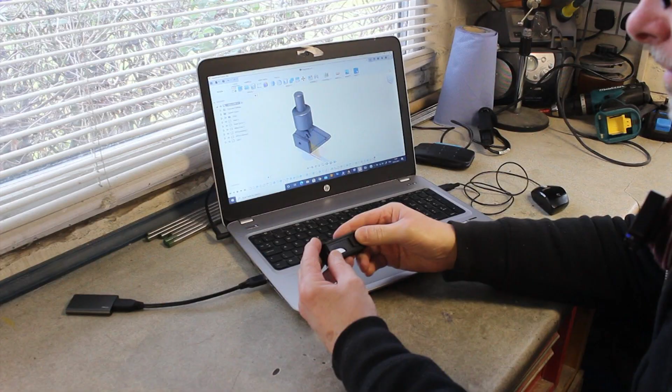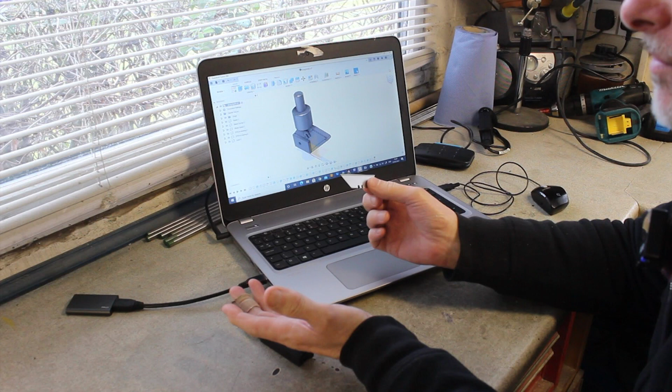Down at work I need to cut cardboard to make boxes, specific boxes. I can't get boxes for some of the products we make that fit properly, so we're thinking of making our own. Also, some of the products I actually sell have a cardboard inner, which is part of the product. So I'm fed up with guillotining bits of cardboard up.

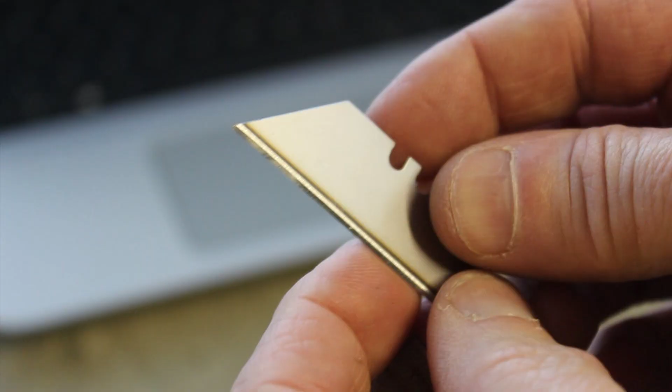So I'm going to make a drag knife, and this is the blade we're going to use. So here it is. This is what it will look like, hopefully. I've had a little look, and this isn't a new type of design. There are commercial versions of this out there. However, I've been looking at them and I thought, why would you do that in this modern day and age?

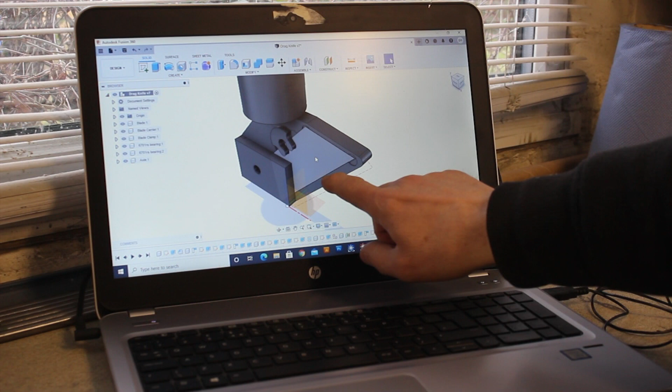On most of them, the blade here is completely exposed at the front. Why would you do that in this modern health and safety age if you didn't need to? So I've actually encased it so that it's less likely that when you're taking the thing off the router, or putting it on, you're going to slice lumps out of your hand. Take it from me. So I've encased it.

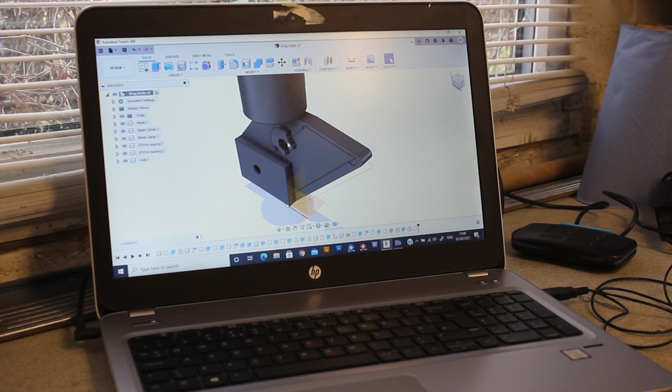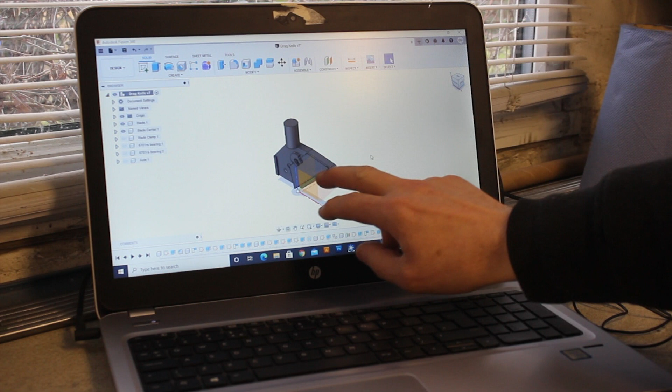Let's go back to the main view and I'll show you exactly what's in here. If I turn the axle off, there you go. And in fact we'll turn the bearings off and the clamp that holds the blade in. Right, so it's just a simple bit of milling with a spindle on the top. On top of that we fit a bearing. There'll be a spacer that I haven't modelled and another bearing, and then over the whole thing goes an axle.

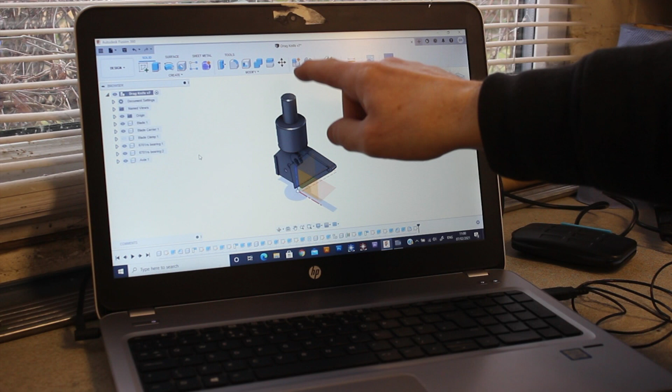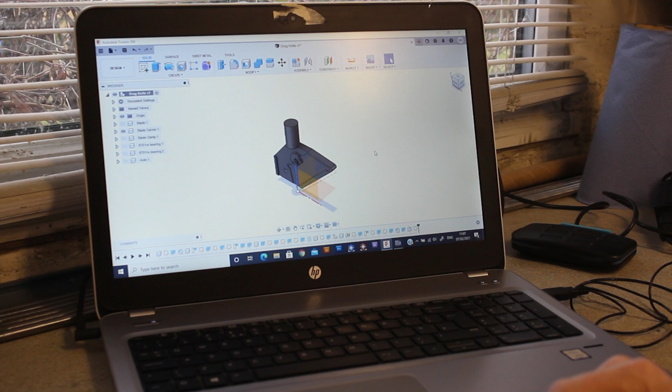So the blade carrier here will be able to spin irrespective of whether the spindle is moving. The last thing you should do with these is turn the spindle on, because you'll turn this into a missile. So let me just turn those bits off. Actually, let's turn the blade clamp off as well. And in fact the blade, there you go, that's the bit we've got to make to start with, which is actually quite a difficult piece to do.

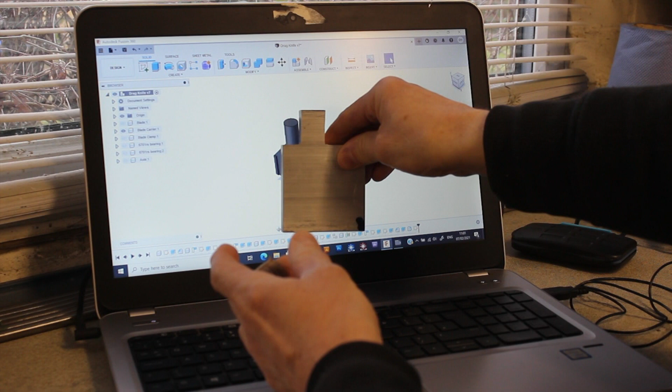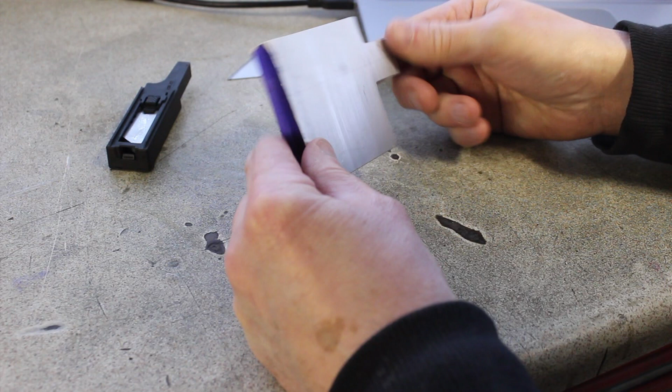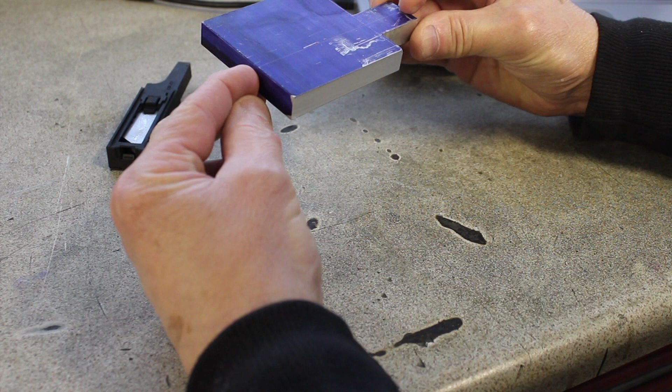Off camera I've whopped out a bit of ally to roughly the right shape. I need to put this in the lathe and turn this piece down so that it's a diameter 12. This part is actually quite a difficult part to hold, because in the finished shape there's nothing that's square or parallel to get a good grip on in the vise. I did think that once this is round I could hold it in my fourth axis, machine one side and just spin it over and machine the other side.

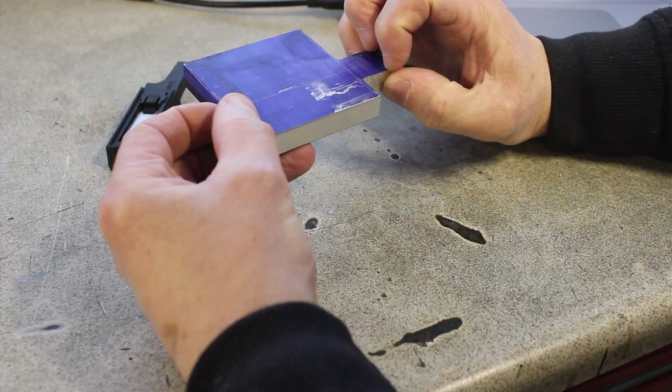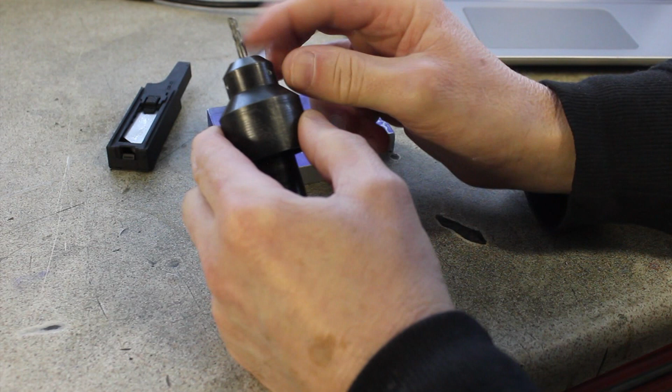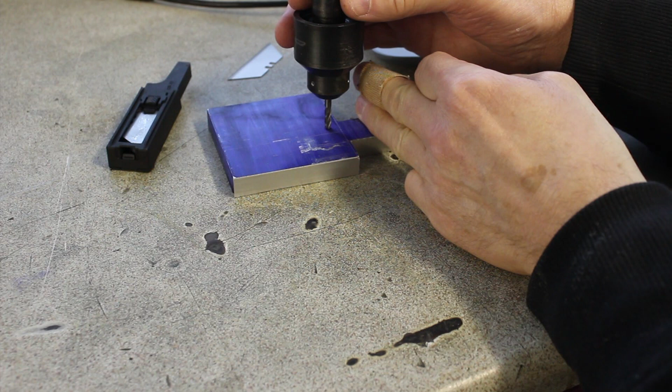The problem with holding it in the fourth axis is the chuck is so big that I won't be able to get close enough access with the tool. So I'm quite limited in tool space. I'll just get that and show you. This is the tool I'm going to use for most of the operations, because it happens to be in the tool holder. I might change it for a new aluminium one, but this is a 4-flute, 4mm. With the chuck holding this part, I'm going to crash the tool into the chuck.

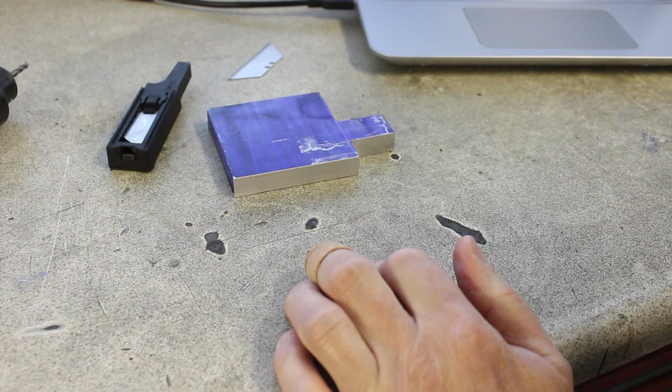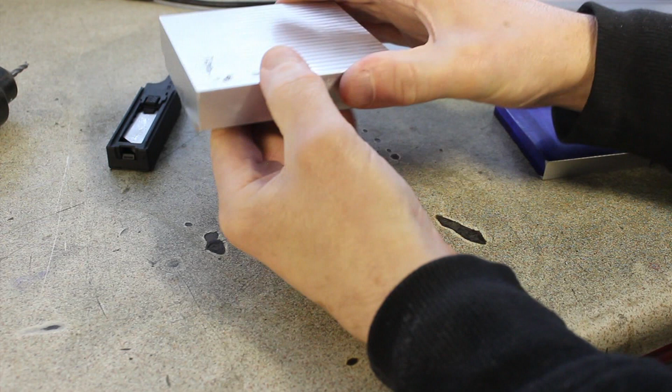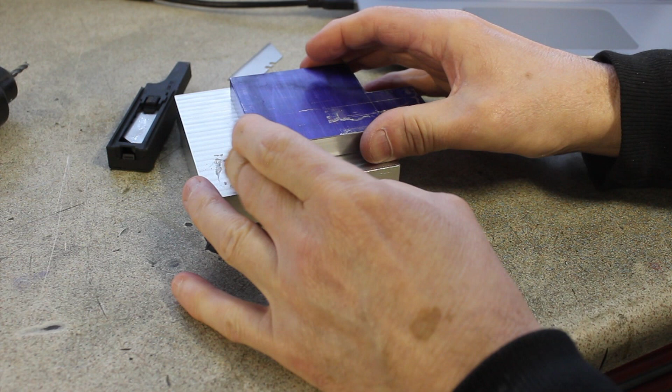So I've come up with another solution which I think should work for another work project that I'm not going to show you. I made this, which is a pallet. This sits in my vise, and I've marked it so that it always goes in the same way. And I'm going to use the painter's tape thing. So we're going to actually super glue this part to this plate that's in the standard milling machine vise.

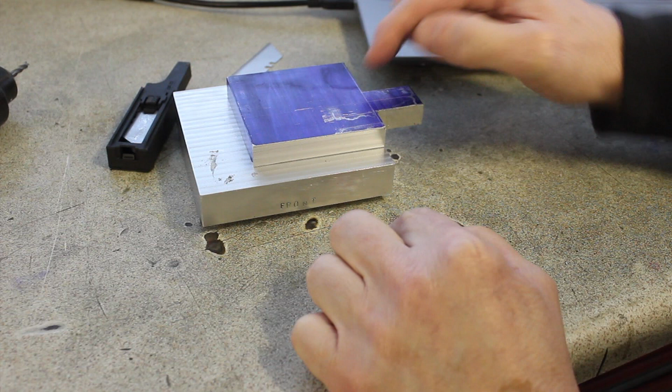So then I've got unfettered access. Yeah, so you can see it easily. So I've then got unfettered access to everywhere I need to go, everywhere the tool needs to go on top of that part. And the flip side is really just a case of putting it in there and facing it off. So I'm not even going to make the code for that. I can do that easily within Mach3.

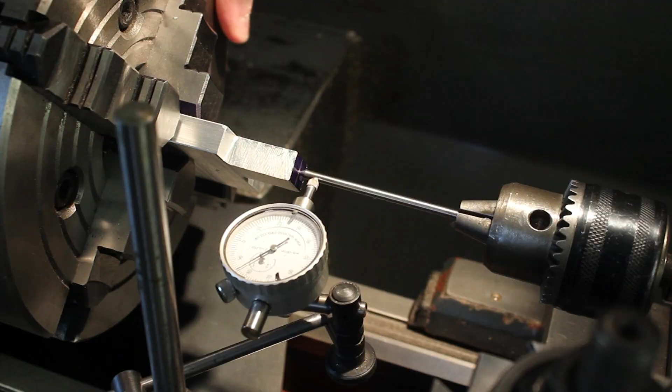So first op, put this in the 4-jaw in the lathe and make that cylindrical, because once I've machined everything else, I can't hold this part, so I have to do that part first. Here we are in the 4-jaw, and there's a little bit of wibble wobble, but we're not overly worried about that, because this part is about nearly 1 millimetre bigger than it needs to be. So with half a mil off either side, as long as I'm within half a mil of the centre, I'm golden.

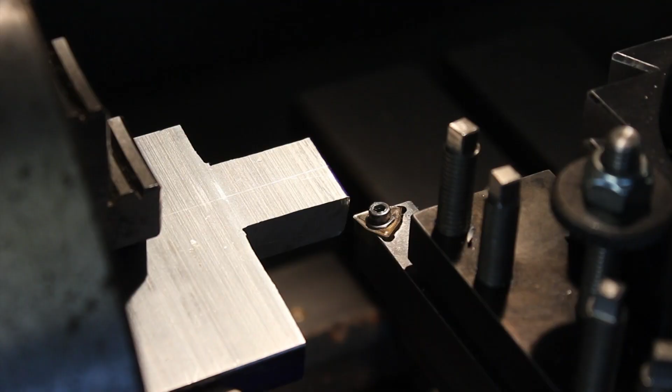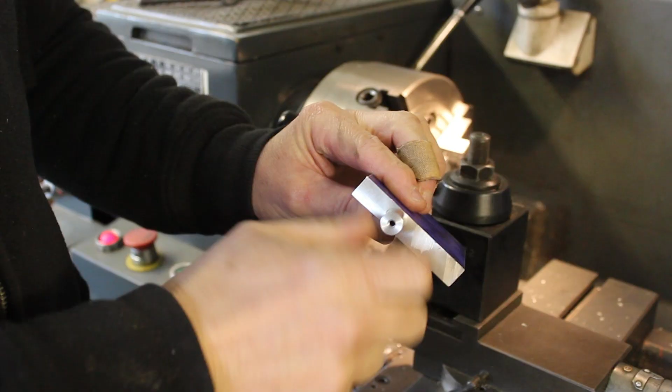Okay, there we have it. The only thing I've changed from the CAD drawing is I've tapped it with an M4, because I just get the feeling I might want to add a screw to retain it inside its housing so that it can't fall out. That could be catastrophic. So here's the bearing, which is a light fit. There you go. Push fit. Here's the front.

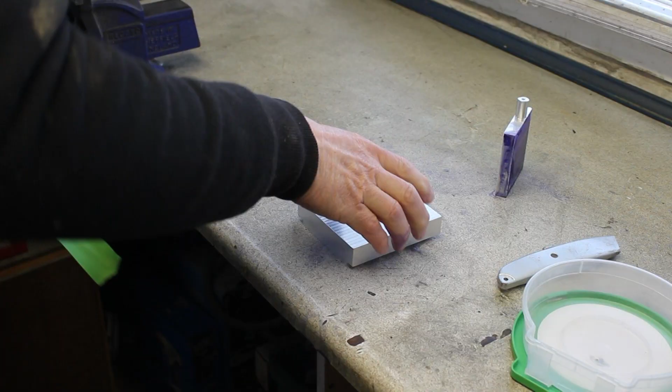I was a bit sceptical about this as a sensible method to hold something while you're CNCing, because I thought the loads might be too high to make it work sensibly. But I have to say, having tried it on another part last weekend, I was blown away. It took a real effort to actually get the bloody part off the pallet when I'd finished.

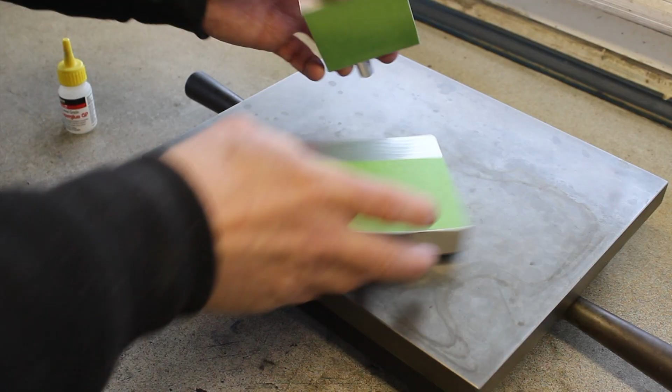I could just stick this on like so and use my finger to line the edge up, but I thought, as I have a surface plate, a knackered old scratched one, the best option is to line it up like so, clamp it up, leave it for 10 minutes for the super glue to get a decent bond, and then I'm away, and I know that I will be square to the mill.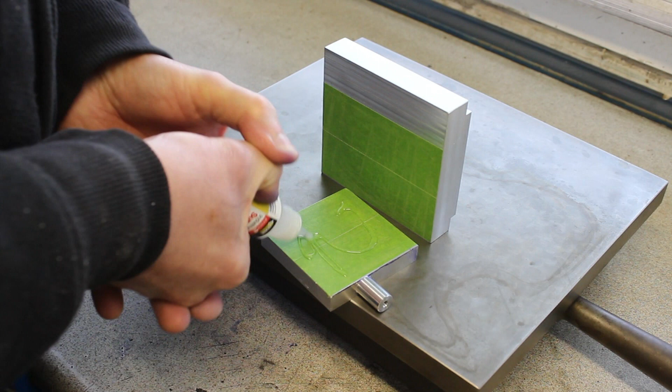Woohoo! I would use my finger. Hell, no, I will use my finger. There we go. There we are.

Give that a few minutes. While that's curing, setting, whatever the word is for super glue, cheap super glue, industrial grade super glue, yeah, I bet, I'll go and set the mill up. Here we are over at Sally the Sieg. Let's just put this pallet in.

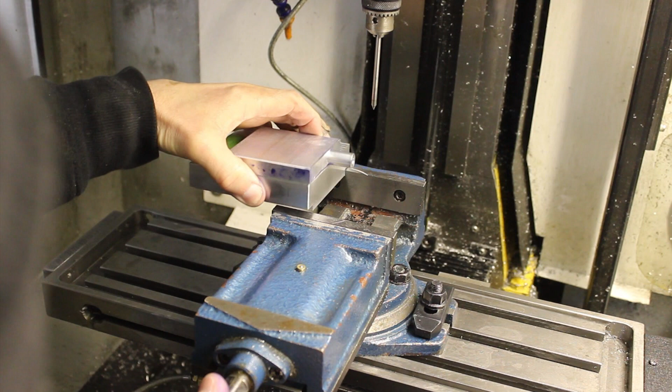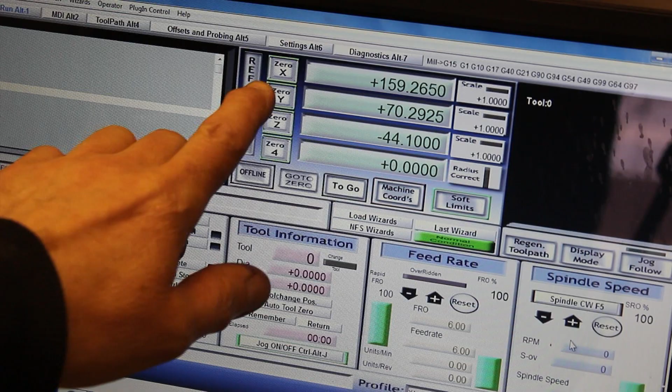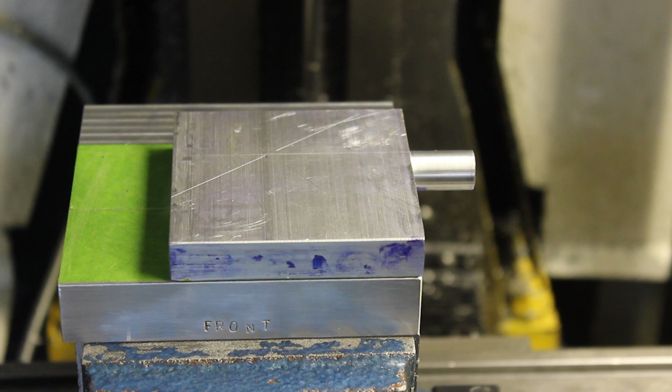We have a 4mm carbide tool in the spindle. I've set up the G54 zero. Hopefully we shouldn't be too far out. Any deviation will bugger up this shaft here. So I've done a dry run at 20mm above. It seems to start correctly. So here we go. Cycle start. Head goes up to reference zero, then it should come down, go to 1mm above, there you go, and start plunging in.

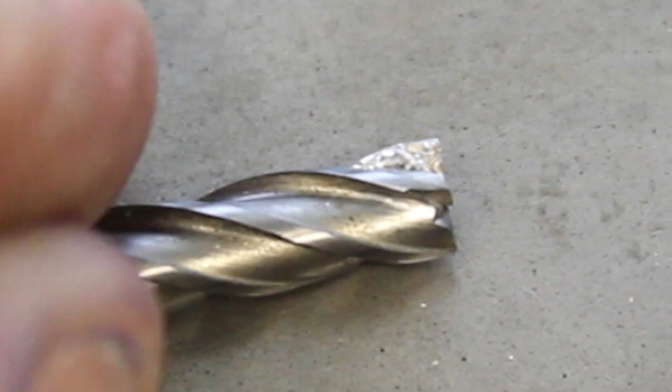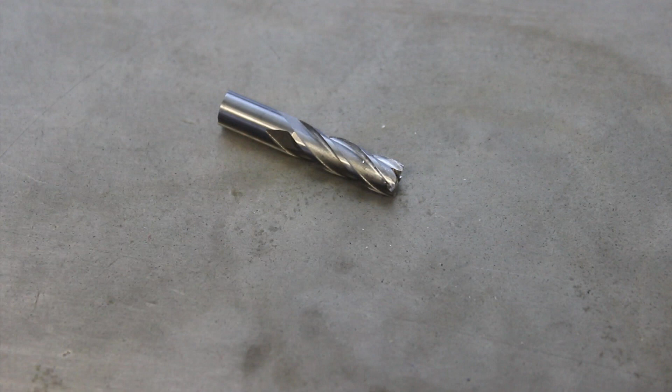I'm not using coolant because I think it'll end up breaking the joint and the part will fly off. So, oh dear, that's the end of that. Here's the problem. Chip weld. So I put a 2-flute in, which is specifically intended for aluminium. I'm also going to risk it by running a very light amount of coolant on.

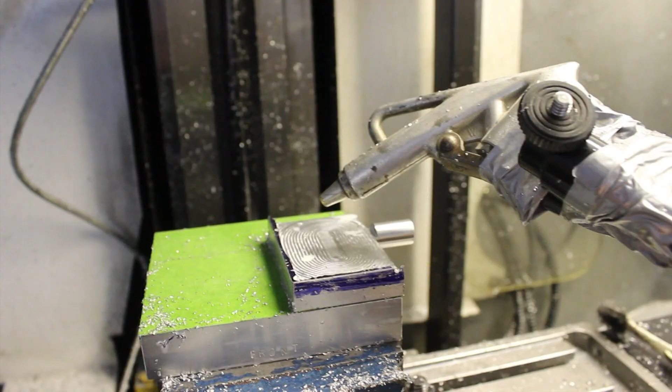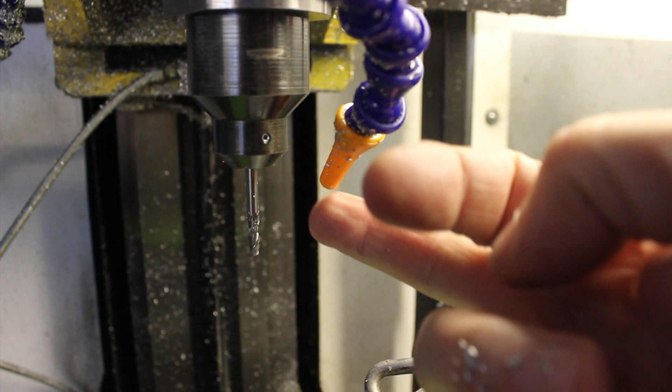There we go. Op 1's finished, and I've jury rigged myself a mist system. There's a slow bleed of air coming out of here from Edward the compressor, and when the tool comes down, the nozzle just drips on the top of the blowgun, and it mists. So yeah, it's not elegant, but it does the job.

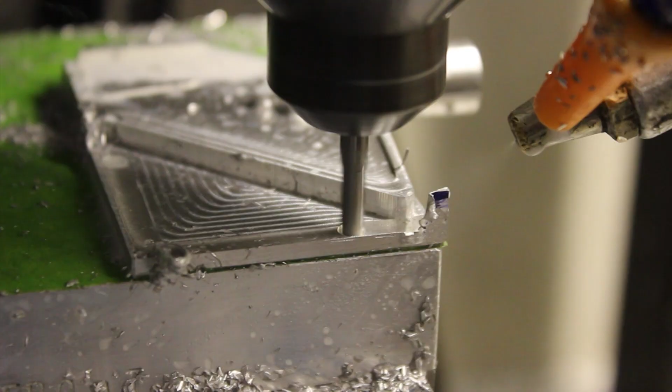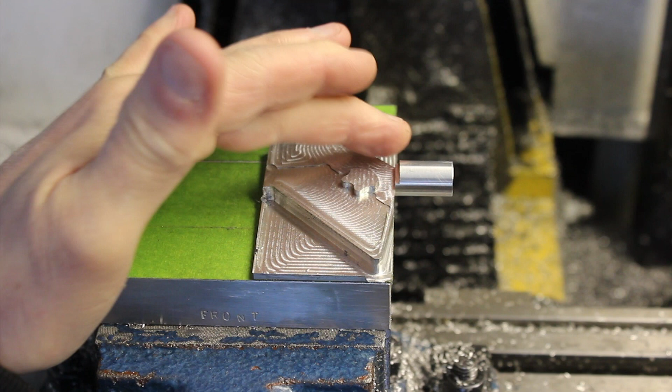This is interesting. It's a week later since I did the last machining op on this part. I had to go to work, and I couldn't be bothered last week. So the next op is to go round the contour and nibble off effectively a bit along the bottom here, and hopefully tidy up the edges.

But the thing that I think is interesting is this has been stuck for over a week now, and the painter's tape is slippery because there's clearly oil in the mist lubricant that I used last week, but it's absolutely stuck firm. So I do wonder, I'll have to do some experiments at some point, whether you could use flood coolant on this for a short job, a couple of hours or so, and still have it stuck on. So anyway, the next op, like I said, is to do the contour. So let me get on with that.

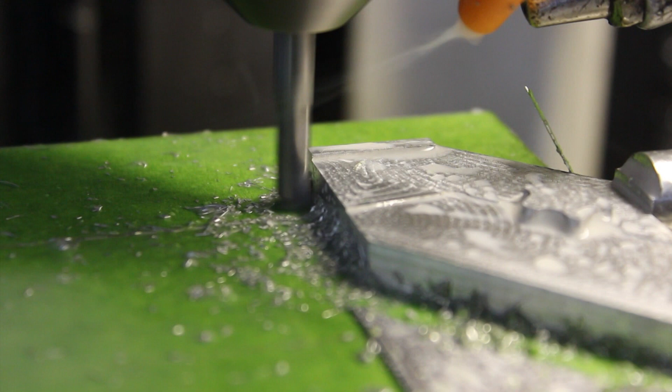Right, I've finished the contour path. Got a reasonable finish on it. I'm quite pleased with that. Slight balls up here, but I caught it before it completely gnarled the part up. I changed the tool because I didn't like the finish I was getting with a 4mm, so I put a 6mm cutter in, and I forgot to change the tangential extension, so consequently I nibbled a bit out of there. Anyway, it's not the end of the world.

This is the final pass with a 2.5mm high-speed steel cutter, because I don't have a carbide one, so it's going to run quite slowly. So let's give it a bash.

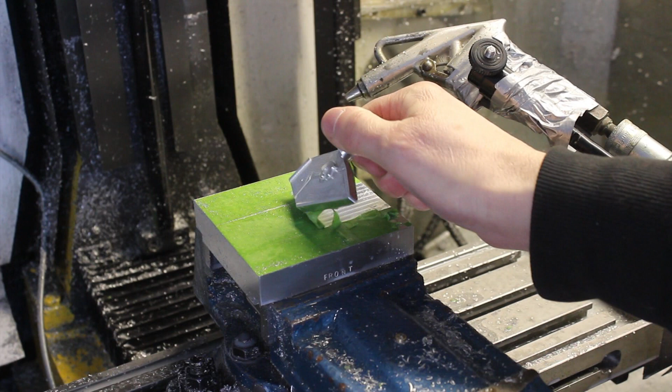All that remains is to get this off. I've sharpened up a screwdriver rather than bugger up a decent chisel. And I'll try and get this up without damaging it. Too much. There we go, it's coming. Right, let's clean that up and go and have a look at it.

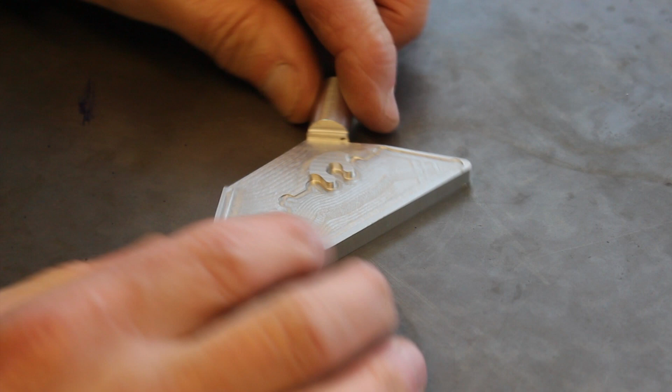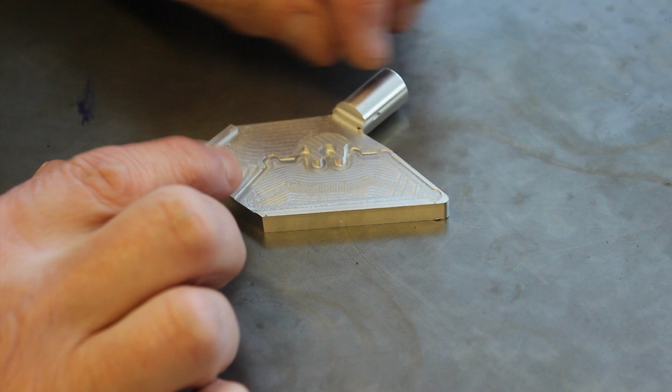Okay, so here we are. That's looking all right. I've yet to clear the back up. Like a numpty, I should have actually machined the back first, then flipped it and then machined the front. But here's a blade. Yeah, that fits more or less that way. There's a tiny little bit I need to remove at the top here. The blade is slightly different shape, I think.

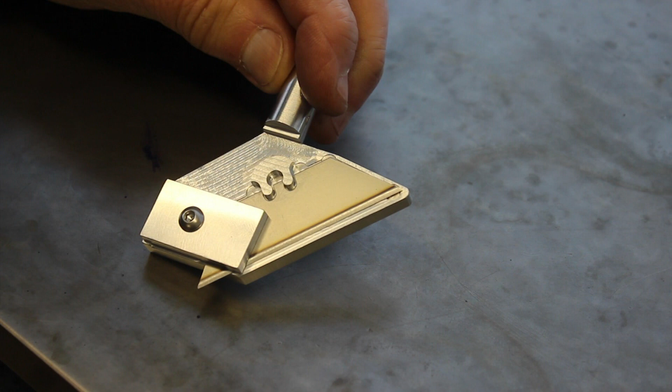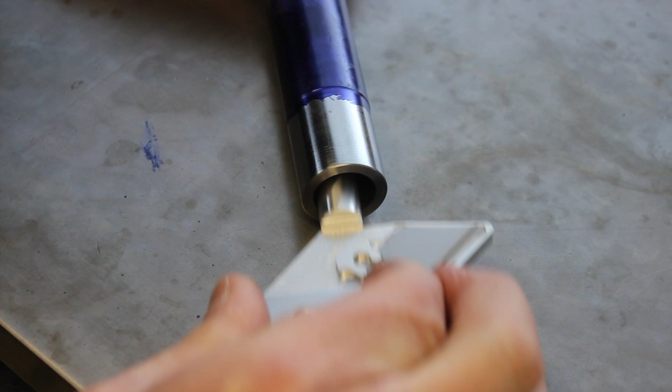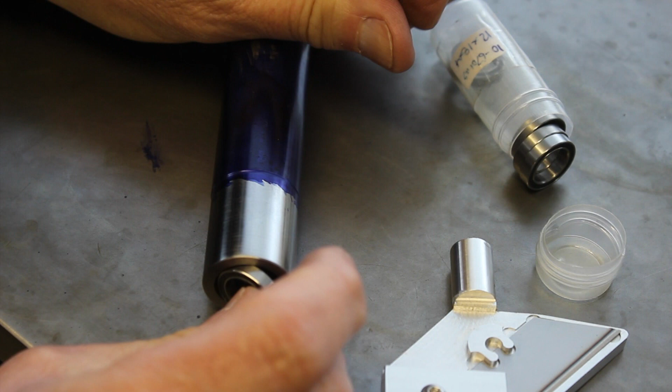Right, so there we have it, assembled. I did face off the back in the end. I thought, yeah, looked a bit crappy, so I've made it look less crappy. Pleased with that so far. That looks almost good enough to work. Right, off camera I've started to turn up the bearing housing. So that's in there ready. The bearings... oops, the bearings are a reasonable fit in the end there. You'll have to take my word for it. So all that remains is for me to cut this off to the right length and turn it down to fit in a collet. And then we can press fit the whole thing together.

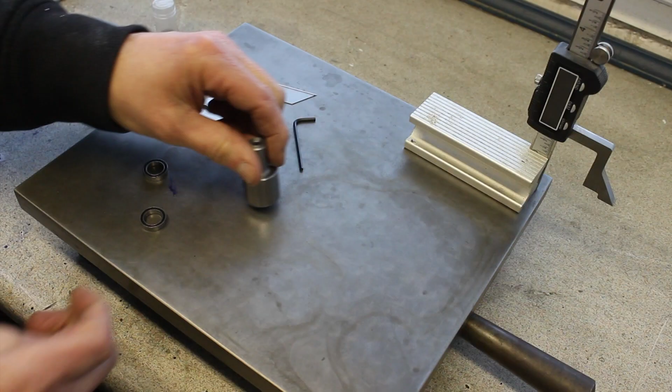10 minutes later, actually more like half an hour later, I've turned up the axle, as I'm calling it. It goes in there like that with the two bearings. I also found some old piece of brass, bronze, whatever, kicking around, so I've made a little spacer to keep the bearings apart. I've heated the bearings up and got them fitted with the little spacer. So they should be a push fit in here. They should be a tighter fit than this, but I might just put a bit of Loctite in to make sure they don't fall out. So let's put the blade in. Ow, carefully. Whoops.

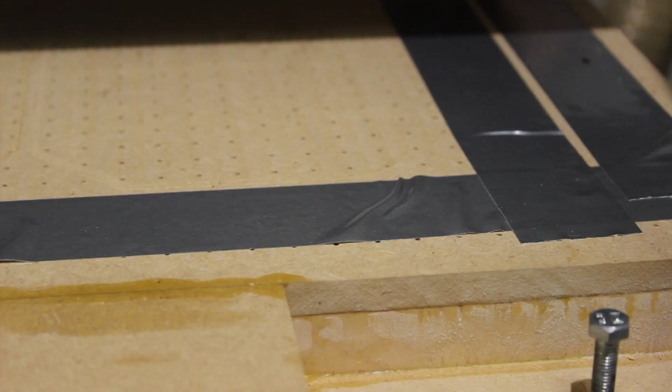Well, there we have it. My version. Here it is. My version of a drag knife. The only thing to do is to put it in the machine and give it a go. See whether or not it works. You can see that the actual drag knife is completely separate from the spindle. Right, here we go in real time.

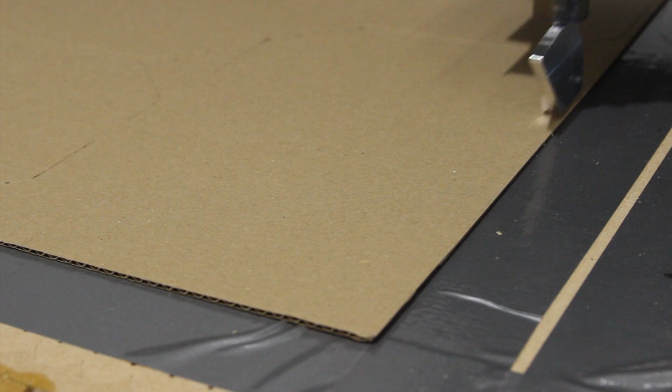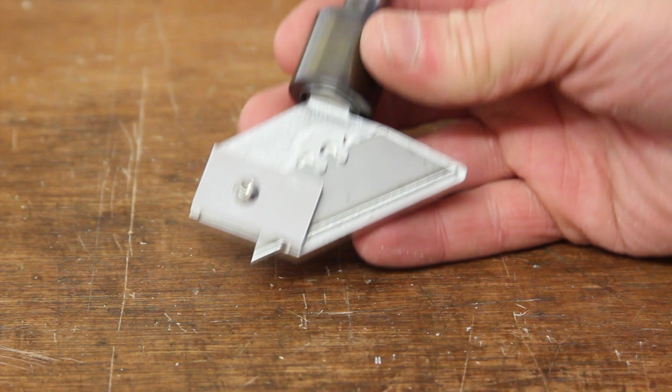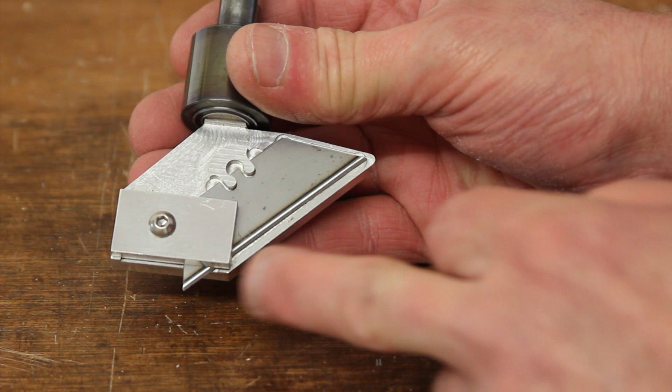Right, so here we are. I think that came out pretty well, to be perfectly honest. Does the job. I only needed to cut out basic rectangles for a product we sell, and there are a couple of things I would change if I made it again. I'd move the bottom edge up somewhat so that more of the blade sticks out, and also I'd bring this edge here out more so that it stops the blade from moving. So far, with a couple of attempts I've had, the blade moves slightly, so they're the changes I'd make. Apart from that, I'm pleased with that.